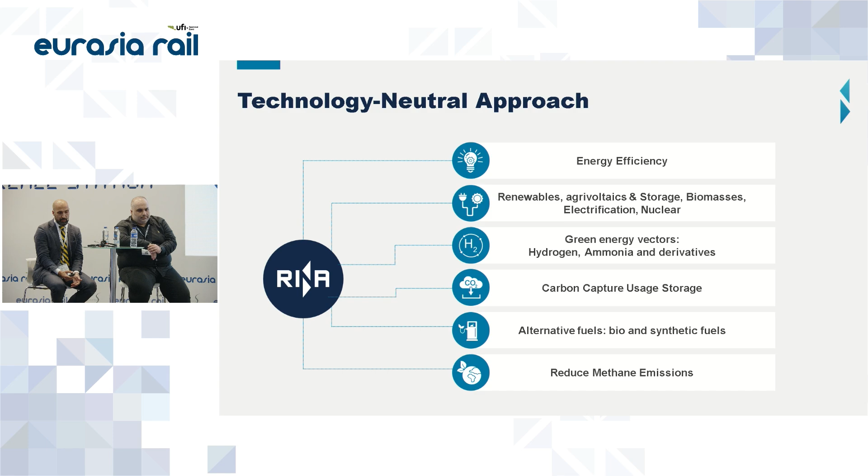RINA is playing a key role in terms of supporting the entire value chain from CapEx to OpEx as system integrator, starting from the energy production through the transmission network, the storage of the energy produced, and also the distribution and end user. As anticipated before, we are experts in green financing, conceptual feasibility study and FEED, permitting, and research and development of guidelines for material use and approval of new technology.

Then I leave the floor to my colleague Yunus. Thank you, Matteo, for your very informative speech. It's very good and brilliant.

Thank you. Of course, our most important subject is global warming for all of our world. It's a depressing subject that we must eliminate for a sustainable world for all of us. As railway and transportation experts, we will have something to do about it, especially electrification of all railways, which is very important to eliminate these effects.

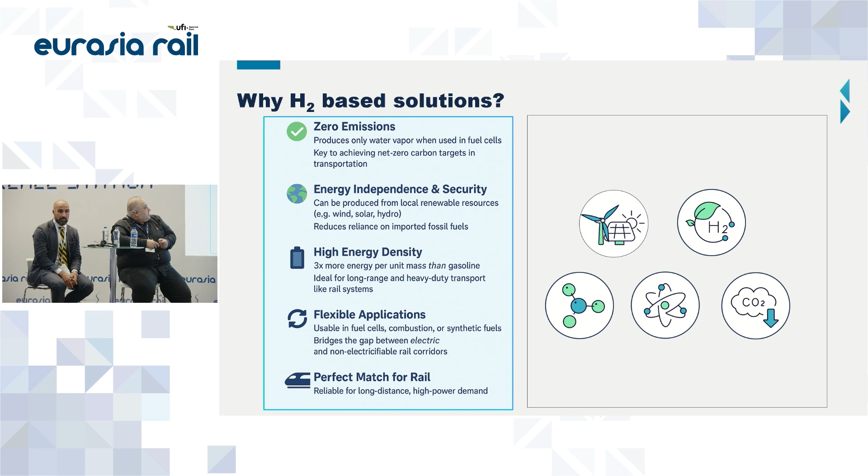Then how can we harvest energy from hydrogen? We have such a good technology, thanks to the scientists for that. It's called PEM. What does that mean? PEM means proton exchange membrane. That seems simple, but it's not so simple to develop this PEM technology, of course.

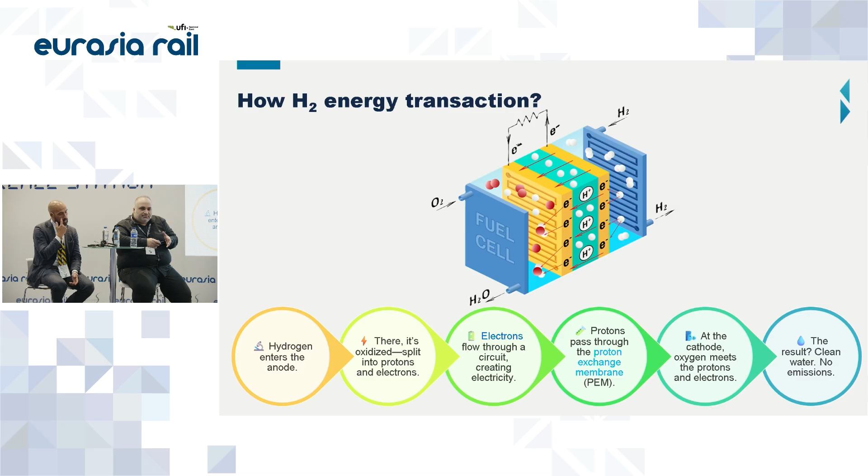You can harvest the electrons from the hydrogen molecules via a proton exchange membrane and get it to your circuit as an electricity current. Then you can give your positively charged hydrogens to the exhaust of the system, and these hydrogens meet the oxygens, forming water, clean water. Your exhaust is just vaporized, fresh, clean water. That's the simplicity of the technology.

Here you can see a small summary of the past and background of hydrogen technology. Of course, hydrogen has existed since the beginning of the world, but it was discovered at the end of the 18th century. After that, Sir William Grove founded the first primitive hydrogen fuel cell. Of course, again, military or space studies led to new technologies, so General Electric and NASA worked on it, and they found the proton exchange membrane and used it in spacecraft.

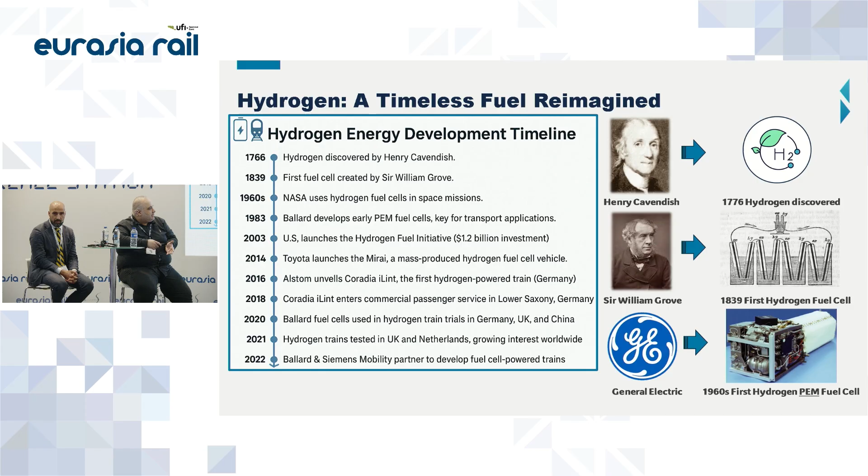But not all hydrogen is the same. Scientists and international authorities have given color-coded names to hydrogen according to its production methodology. For example, green-coded hydrogen is produced by electrolysis using renewable energies. And you can see here the brown hydrogen, which gives off waste carbon dioxide. We can harvest hydrogen from gasification, but we also gather carbon dioxide, so we cannot call it totally zero emission.

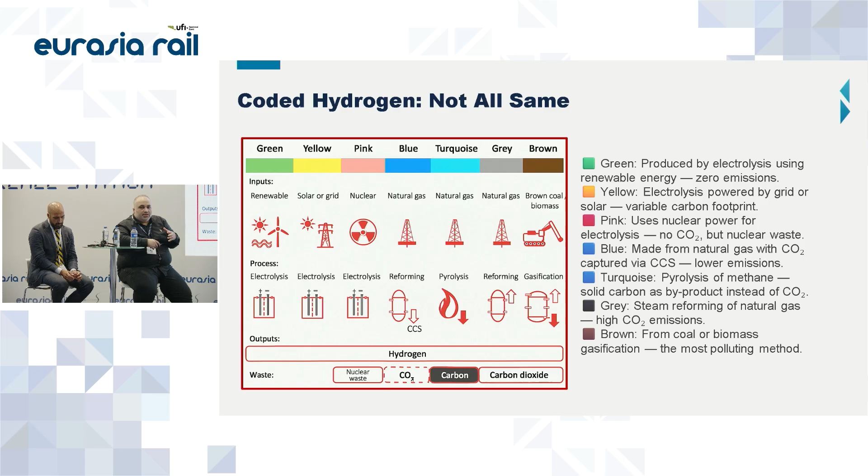So we should chase after the green, yellow, or non-carbon emission hydrogen producing technologies. But we also have some chances, especially in our country, in Turkey. We have a natural one, the white hydrogen. It's a natural mineral, boron, found in Turkey, in our country. Boron keeps all the hydrogen, absorbs all the pure hydrogen inside it, like a sponge absorbs water.

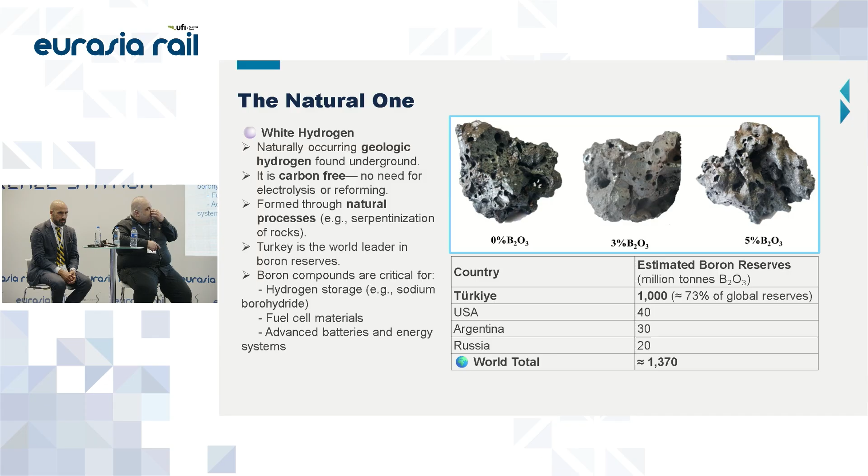These boron minerals include 99% pureness hydrogen in them, and over 70% of the world's reserves are in our country, in Turkey. But it's a question whether we can use it in a proper way. For now, we can say no, but we hope someday we can use it properly for energy harvesting.

Of course, it's very simple. We still have some railways in America, and electrified rail lines in Turkey and Europe. We know all that. Especially when converting steam rail lines to clean, electrified energy, hydrogen will play a great role in that. It's simple: we will install our hydrogen canisters, tubes, fuel cells, and electric motors, and we will get electrified, hydrogen-powered locomotives.

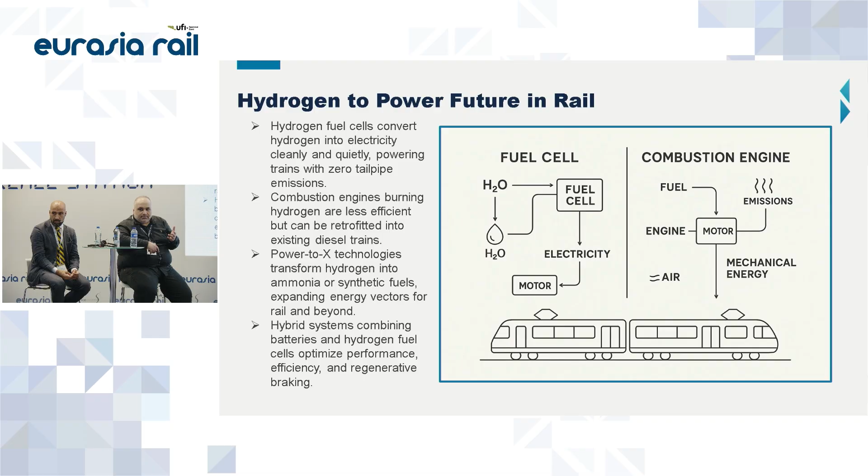Of course, that's not everything so pinky. We got some cons and drawbacks for the hydrogen energy, especially for our century.

We got just one technology about it, the proton exchange membrane. Some Japanese companies are trying to see if we can produce a combustion motor with hydrogen. But I see that it's not efficient, because electric power has more torque in electric motors, and has a huge efficiency compared to combustion motors.

Also, we have high initial costs for hydrogen energy in this century. Storage of a big amount of hydrogen is a problem for us for now, so we need to make it a widespread technology in the world. And of course, there are safety concerns, especially for fire.

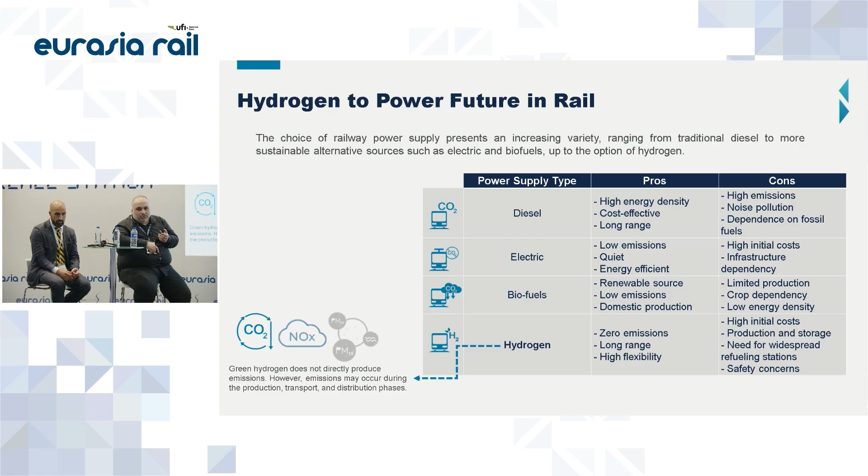You can see operational examples in the world, especially the Alstom Coradia iLint in Germany, operational since 2018, which has covered more than 1,000 kilometers successfully. Also the UK...

produces its retrofit PEM fuel cell HydroFLEX trains. And in Italy, there are new projects about constructing hydrogen valleys, so they also produced Alstom Coradia Stream hydrogen trains for Italy. And you know the USA has its huge freight locos, diesel locos, and they are trying to convert these diesel locos to hydrogen-powered locos, and CSX is the biggest example of it.

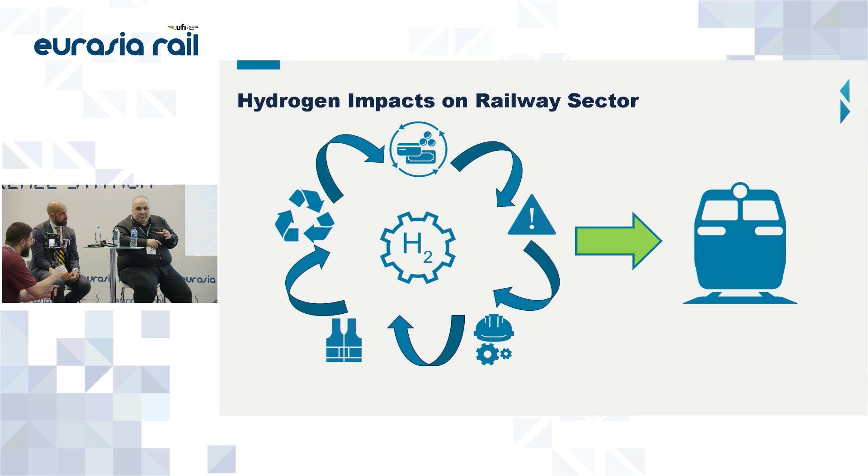So yes, we saw the 101 about hydrogen, but hydrogen power integration will have some impacts on railways, especially for storage and refueling. We should install huge pipeline networks to provide hydrogen refueling into the trains.

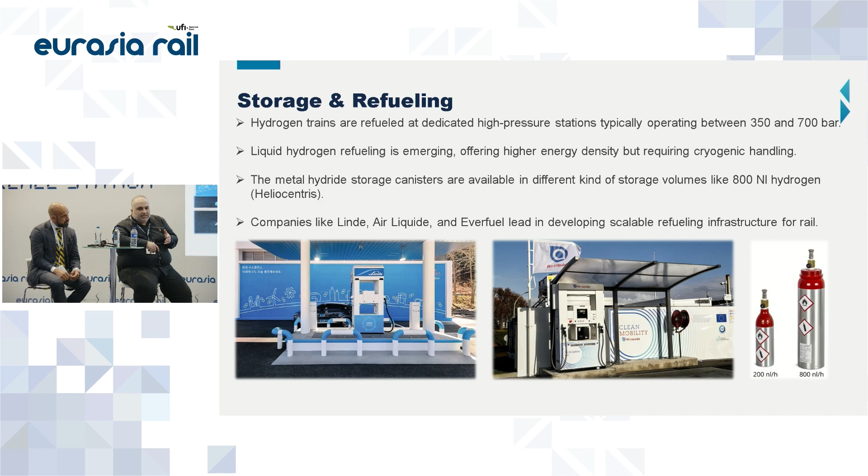That's a must, especially. But already some companies, Air Liquide, Linde, and Heliocentris, are working on that. And as you saw in the previous slide, the Alstom Coradia iLint is refueling at any station with hydrogen in 15 minutes.

And we should consider the maintenance and operation differences, because we will need some expertise and specialist staff to carry out these operational issues about hydrogen. And the concern is that if we cannot provide proper maintenance on it, it can give catastrophic results for us.

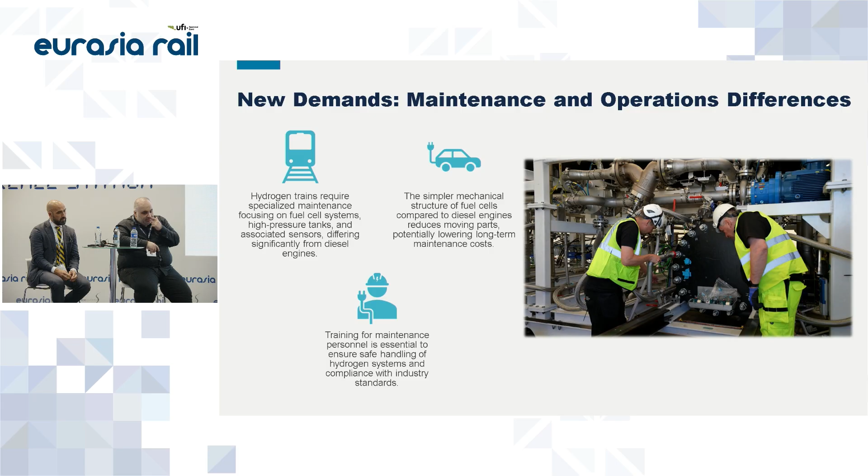And of course, we are talking about railways, so we should talk about RAMS, the EN 50126 standard, the fundamental bible of railways for reliability, availability, maintainability, and safety. But we can see some data from the site, especially from the Alstom Coradia iLint, where the mean distance between failures is 15,000 kilometers, and their safety is at a very high level.

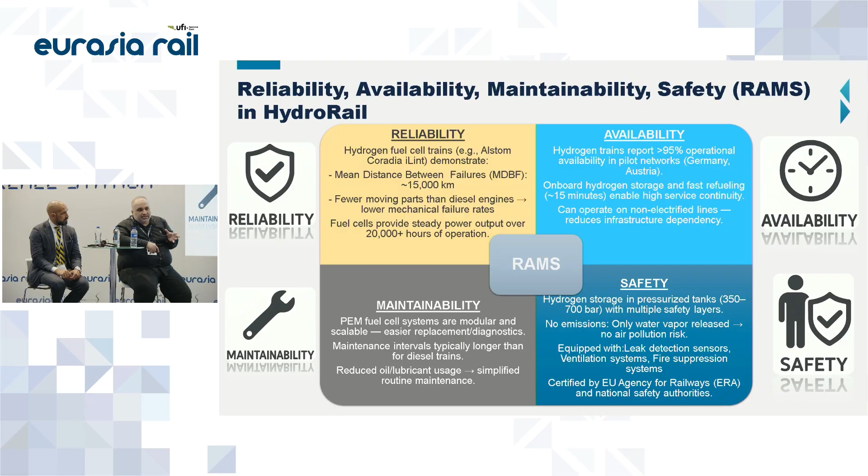There are some canisters and tanks working at up to 700 bars. But in the future, if hydrogen becomes widespread, of course this area will need to improve with additional standards, I believe.

You can see some fire suppression systems for hydrogen on a train. We can detect some malfunctions with pressure, heat, or leaks, and we can suppress and extinguish them with automatic systems. So these technological and fail-safe fire suppression systems can be improved. No need to worry about it.

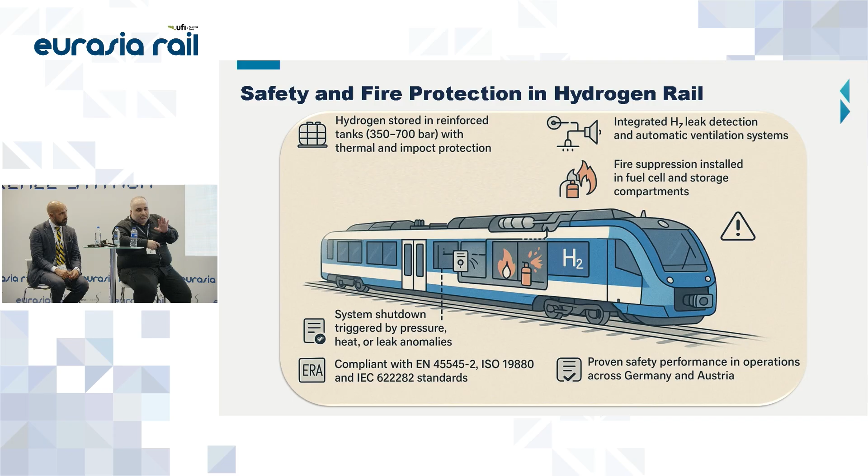Also, the world is working on some national and international standards. You know, all the work cannot go on without standards. So we have standards for pipelines and valves for hydrogen, national and international. And our other bible, NFPA, also has a code for hydrogen works. It's very important, it's a general standard.

And also railways which are using or planning to use hydrogen should of course consider these standards.

Yes, why do we need renewable sustainability? We can explain this through global warming, but what strategy does the whole world have? We can see that the European Union has a target about decarbonizing whole sectors until 2050. Also the USA has the same target for 2050, and Japan and South Korea have the same target, and all the countries signed the Paris Agreement to decarbonize the whole world until 2050, decreasing the carbonization level.

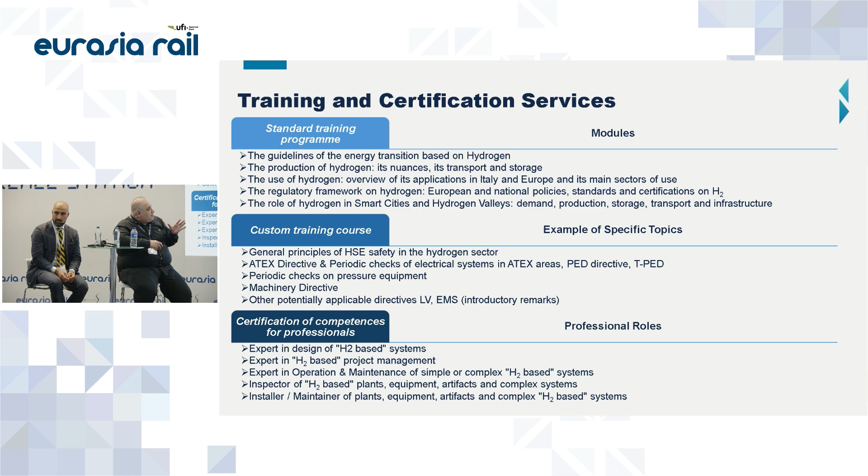We also have chain traceability studies and certification for hydrogen producing methodologies and steps, especially for electrolysis, because electrolysis is one of the fundamental hydrogen producing methodologies nowadays. So we have an accredited laboratory and accredited certification especially for that. But another method of producing hydrogen is ammonia cracking. You can turn ammonia into hydrogen, and we can give certification for that too.

And we can provide this certification in digital assets, so you can reach it from everywhere and get your support from everywhere. We are using customer, partner, and RINA triangle to support this. Also, carbon reduction certification, we can provide this according to our accreditation.

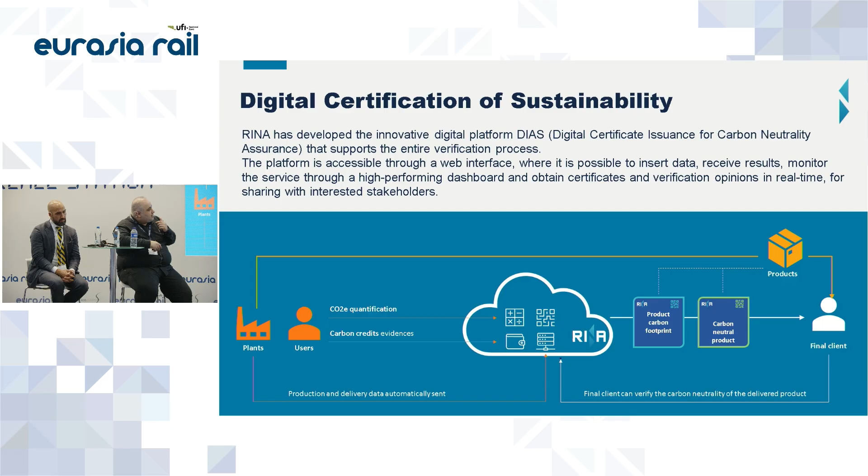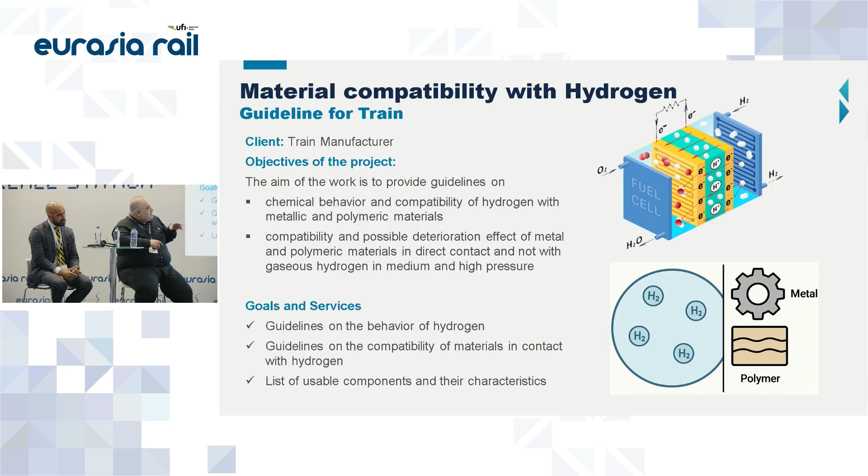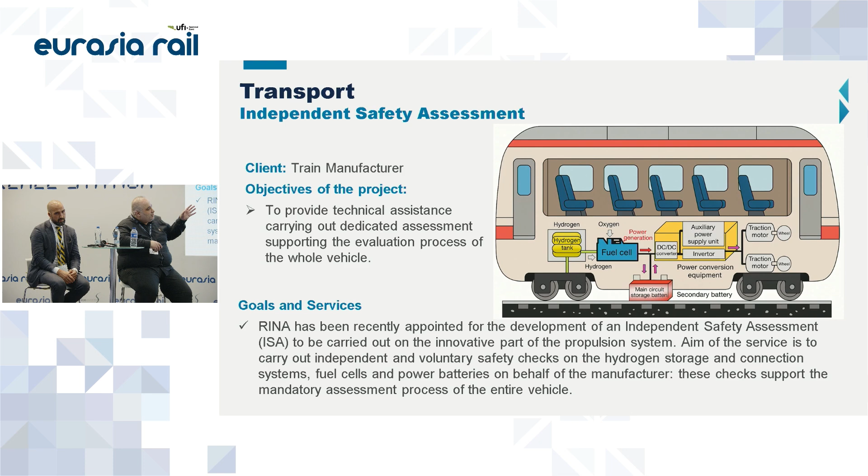We were also involved in a project to retrofit a PEM fuel cell to a train, and we worked for this train manufacturer as the independent safety assessor to install this PEM fuel cell technology safely into their train.